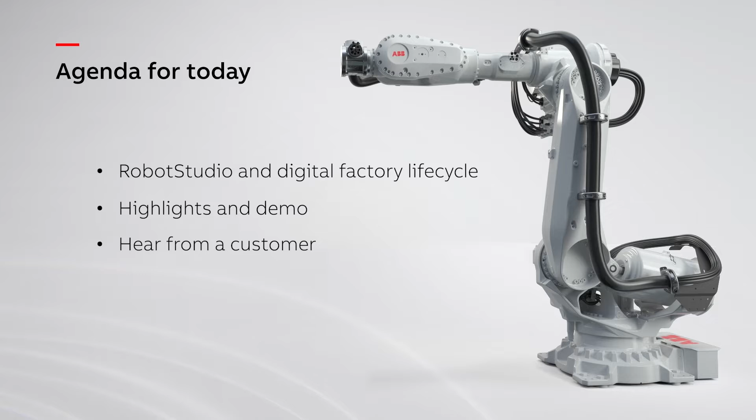Boris and Adrian, thank you for being here today. Boris, you're the head of digital at ABB Robotics. Please, could you tell us what is going to happen today with this big announcement that you've got for RobotStudio? Thanks, Sharon. I'm super excited to be here today. We have a great announcement to make: RobotStudio is expanding into the cloud.

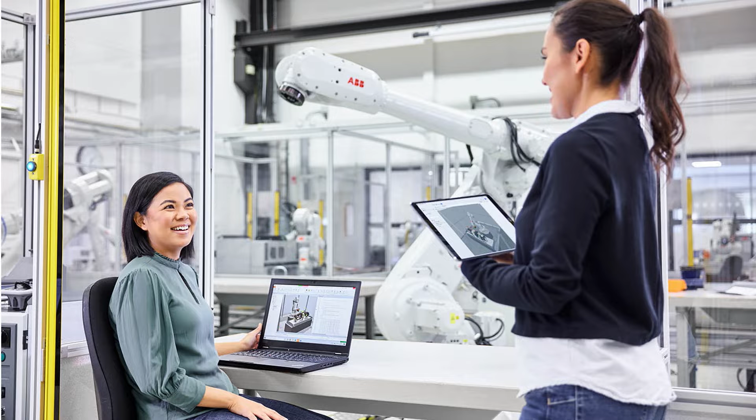And with that, we're introducing a lot of cool new collaboration and other features for our users. For decades now, we've been installing robot systems all around the world, and we took all that experience to develop and continuously improve our RobotStudio system, making it the industry-leading software for robot commissioning and programming. And it shows: tens of thousands of users worldwide are using RobotStudio every day, delivering innovative robotic solutions to their customers.

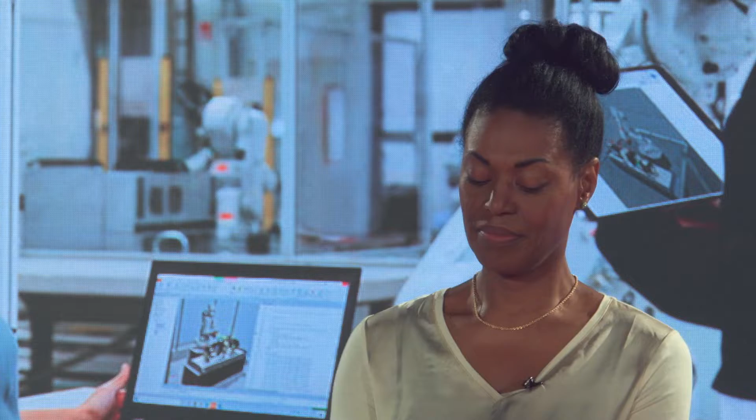And to what extent can RobotStudio support businesses then? RobotStudio is actually active in all the phases of the life cycle of a robotic cell. There are three phases. The first phase is design and planning. The second is building, operating, and commissioning the robot cell. The last one is optimizing and maintaining.

In the past, we very much focused on the first two, with powerful virtual commissioning features which really changed the way things are done in the industry. And with RobotStudio Cloud, we are now truly closing the loop, enabling everybody in the life cycle to contribute and incrementally improve the robot system all the time.

Talking about closing the loop, Boris, let me just add a tiny bit on that. As you may know, at ABB we have a very broad portfolio of automation solutions. We have industrial robots, which we're best known for. We have collaborative robots, we have autonomous mobile robots. And I'm not even talking about the whole partner ecosystem that provides PLCs, sensors, grippers, and things to add on top of the pure robotic cell and solution.

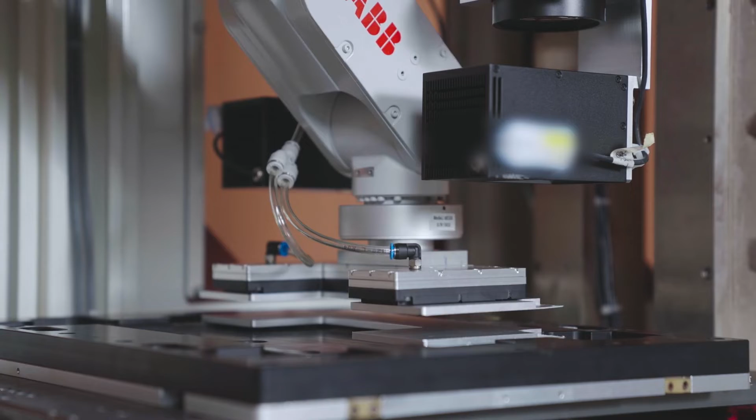So on top of that portfolio, we have over 70 software variants to make sure we have solutions for all the use cases and requests that customers can pass on to us. Now, in my experience from visiting factories and customer sites, we see that the tough part in projects is getting all of that to work together in unison.

Yeah, but not only do we need to get all this working together, all these devices and software solutions produce data - a lot of data - and that can be tricky to manage. We've been collecting that data for more than 10 years through our different solutions. We think it's important to collect it, because that's how you make data-driven and informed decisions to run a factory optimally in real-life situations.

So we believe that all this data from the devices, and getting them to work together, is something that can be done really well in a simulation environment. And that's why RobotStudio Cloud is the perfect hub to get started on that journey.

So it seems like expanding into the cloud is the next obvious step for the RobotStudio journey. Absolutely, and it's embedded in the new way of working which we've all got used to. Just take this LinkedIn Live event as an example - dear viewers, you might watch this from home, your office, or anywhere else. And that makes life more productive and, of course, more sustainable, as you just don't need to travel everywhere anymore. We at ABB Robotics want to be part of that solution with RobotStudio Cloud, bringing collaboration to a new level.

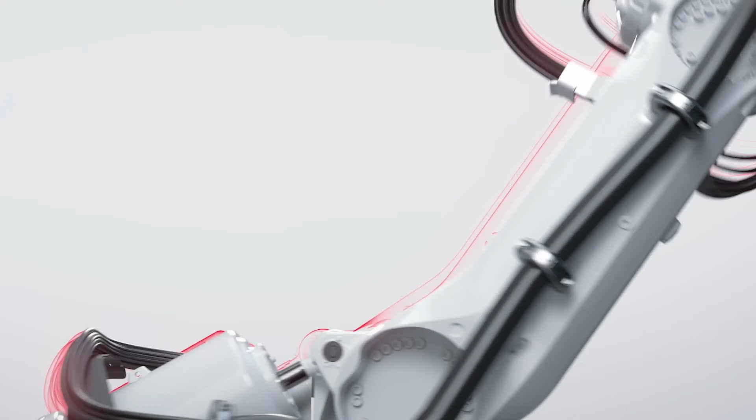Wow, really looks like ABB is helping customers push the boundaries of robotic programming. I'm sure viewers are eager to hear more details about RobotStudio Cloud. Let's hear from Product Manager of RobotStudio Cloud, Magnus, who has been working for more than 20 years in software simulation technology. Magnus, over to you.

I'm absolutely honored being here today, and it's my pleasure to present to all of you watching RobotStudio Cloud. For more than 25 years, we have been the industry leaders and pioneers in offline programming simulation. We at ABB were the company that created the virtual robot controller, a true digital replica of the real robot software that runs on the shop floor, and we brought that to the PC to ensure that what you see on the screen is identical to what happens on the shop floor. We are still the industry leaders in this, and still unique in this area.

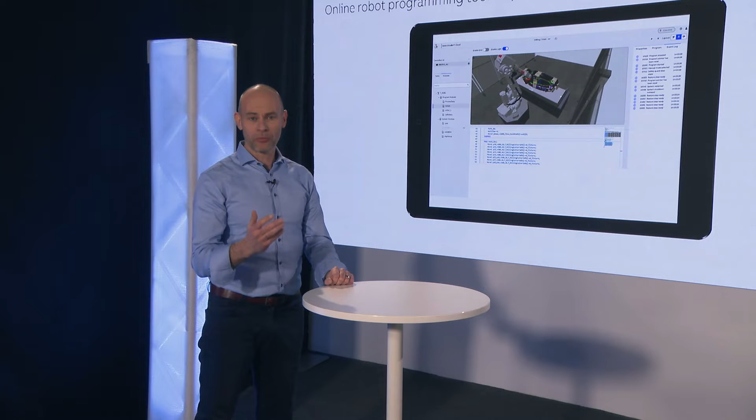Now we take the next level in digital robotics by taking RobotStudio into the cloud, allowing users to create, simulate, and collaborate in real time on automation solutions. So, ladies and gentlemen, I give you RobotStudio Cloud.

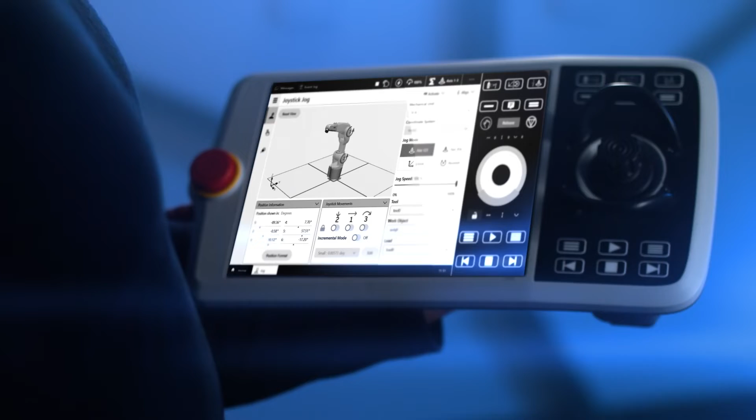So Magnus, collaboration, simplicity, transparency, and best-in-class technology all rolled into one powerful online tool. Magnus, please, we can't contain ourselves. Could you divulge to us how users will benefit from this revolutionary robotic software?

Yeah, the first key highlight is of course the collaboration. Cloud technology enables coworkers, partners, and customers to collaborate in real time on automation projects on any device from anywhere around the world. You can invite your team members and keep everybody in the loop.

That will speed up the commissioning time without the need to be there physically on site. Traditionally, you have to travel to the factory, sit next to the robot, make the changes, and push it down to the robot. But now you can solve that completely remotely by getting invited to the project and solving the issues. As a result, team members become more efficient, stay updated, and are able to work from anywhere with this technology.

So efficiency while working together, anywhere. But what about simplicity, the simplicity aspect?

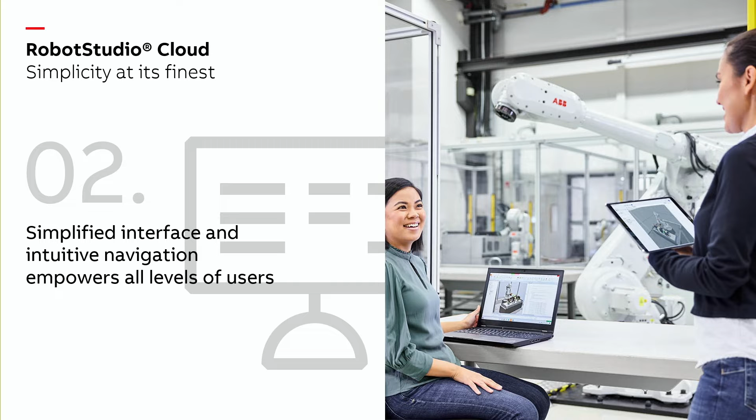The tool is designed for editing and tuning of an existing automation solution, and it comes with an intuitive interface and simple navigation that empowers all users at all different levels. We've taken only the needed but necessary features from the desktop and moved them into the cloud to support fast but still accurate changes to the robot program. The product is designed to lower the threshold for automation, allowing new users and new segments to move into robotics, as well as supporting our more advanced users in their daily work.

Well, you know what, I think we all enjoy a sleek interface with easy navigation. Tell us a little bit more about the transparency side of things.

Transparency is one of the most challenging things in a production system. Keeping track of all the different versions and understanding what is actually executing on the robot controller is very difficult. RobotStudio Cloud comes with a built-in version control system, so you can keep track of all these versions. You can allow multiple users to work in multiple branches without affecting the original file. You can see all these versions in a tree, and you can easily roll back to previous changes if needed. In software development, this is standard, so we've taken those principles and moved them into automation, but simplified.

So I would say this functionality will be groundbreaking for all our users in the next few years. Wonderful. So I think the thing we need to repeat here is that all of this is on top of the incredible industrial leading RobotStudio platform, which has delivered best-in-class virtual controller technology for the past decades.

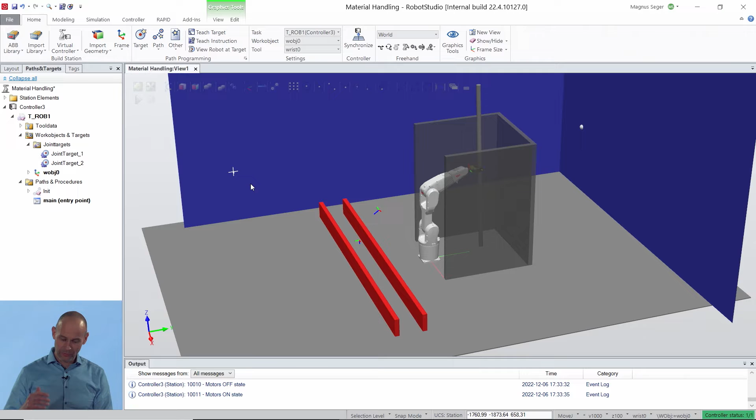Sure, thanks, Adrian. What we're going to do, we have a small sample station where you and I will upload to the cloud, and you and I will collaborate around it. So I will start first from the beginning to create this simple, small program, upload it in the cloud, and invite you to collaborate with me. So let's get going. All right, so over here we have a small material handling station, where we have a robot, a particular fixture, and it's trying to move it in between three separate walls.

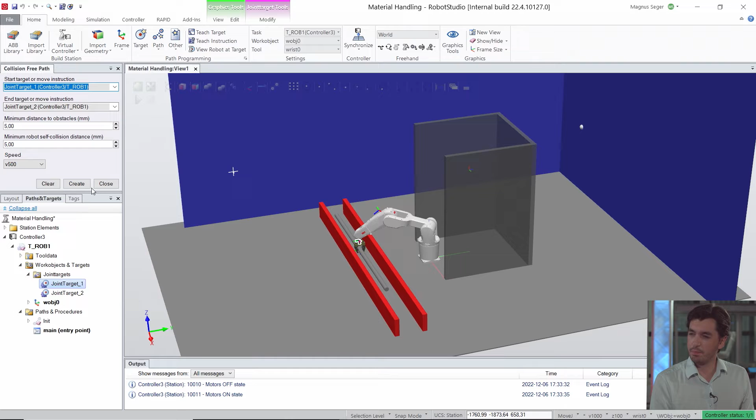So the first thing we're going to need is a path to go from point A to point B. We actually had fun with this particular station with our own engineers who needed a few hours to program this path optimally. But RobotStudio can do a bit better than that. Exactly. So you just select start and end position, and the system creates the collision-free path automatically for you, as you can see now on the screen. So it moves collision-free, and we are pretty much done in seconds to create this path.

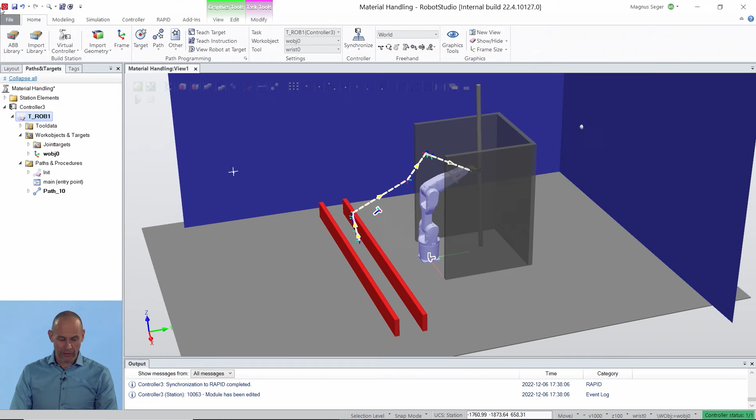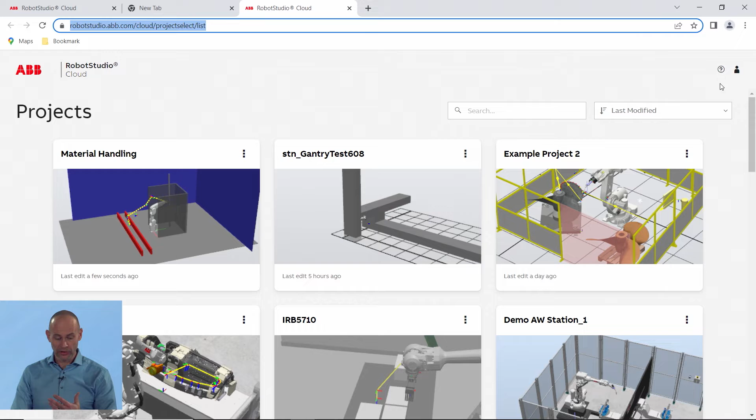So the next thing I will do is actually just upload it into the cloud. So I will share it, I will store it, and upload it. I just do this, and now it's on its way to the cloud. Okay, so I can move into the cloud project portal. And as you can see, the created station, the one that I just created, is now uploaded here. And this is my project. I'm the only one that can see it. And the only thing that I have to do to get you started to collaborate with me is go into the version, or into the dashboard of this one, and invite you to our team. So I simply press invite team, type in your email, create an invite, and email that to you. And now you and me are team members.

Okay, and now over to you, Adrian. All right, so I got your email. Perfect, it's right here in my inbox with the invite link. So let me just click on it and see if this all works as planned. Hopefully I can log in with my personal user account. This is just mine. And yes, I received the cell that you just uploaded a minute ago. So right here, we can actually see the project with all the different things that were created by Magnus. And I have access to all of the branches.

Exactly. And the first thing now, because I'm the owner of this project, you need to create a specific branch to do your changes. So you have to create a new branch just to be able to start doing edits to this product. So first start by creating a new branch. Right here, I click on new, and you just name it to something clever.

And this is like standard in software industries, that you don't work on the main branch, you do the things there first, and when you're happy, you take those changes and put them back to the main branch. So now that I've created this branch, I can basically do the changes I want on the project without messing around with whatever you might have had before, without affecting it. So please open up the graphical view where you can do the tuning and edits.

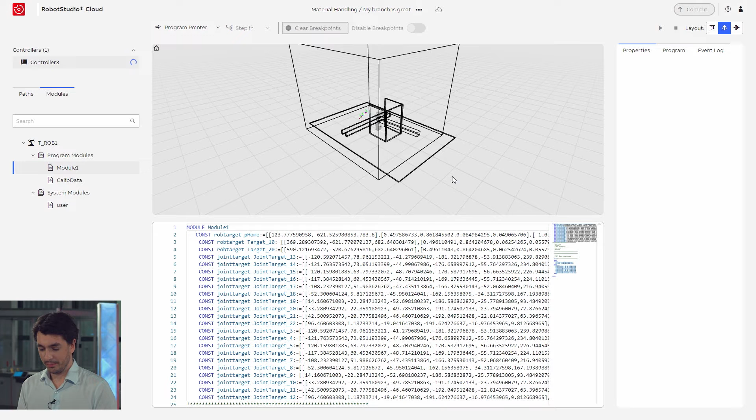All right, and there we have it. I do recognize the cell that you were mentioning from just before. It's the same one with the same path that we had on desktop a minute ago. And as everybody can see, we have this smaller interface that's a little bit simplified. Maybe you can walk us through the different sections that we have on screen here.

So the first thing and the most powerful thing is that you can see now the virtual controller is starting up. So we have the virtual controller in the cloud. And that, of course, will make it possible to test, run and debug the product. So you can actually put in breakpoints and scan through it, just as you can do in a desktop product. Together with that, of course, you have the graphical view where you do the edits and the RAPID programming window where you do the changes to the code.

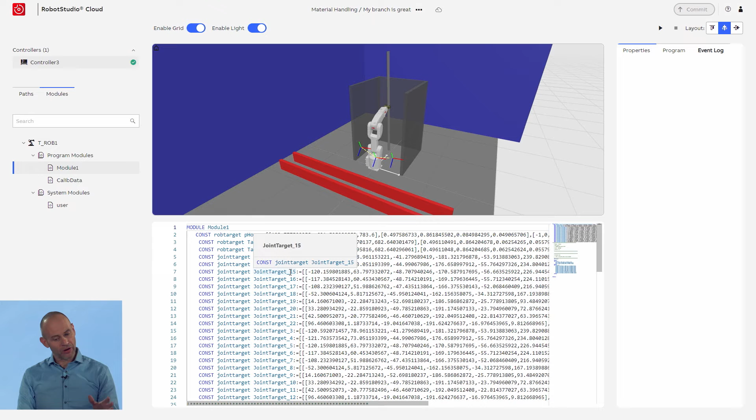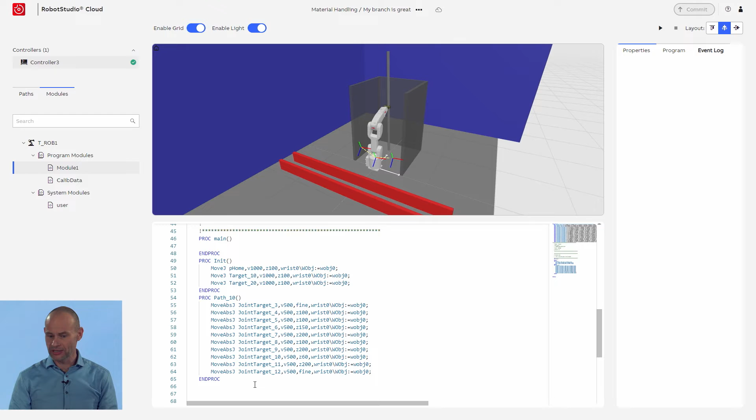But as we said, we have a quite simplified and intuitive interface, so you can actually just select the instruction and do an edit. So if you just demo that, Adrian, select one of the instructions there and change some of the arguments. Sure. You have 2 or 3 different options really here. One is, of course, that you type it as normal, or you select that one and go to the Properties tab to the right and choose the given arguments that you can do. All right, so you don't have to be really an expert to do any of those changes.

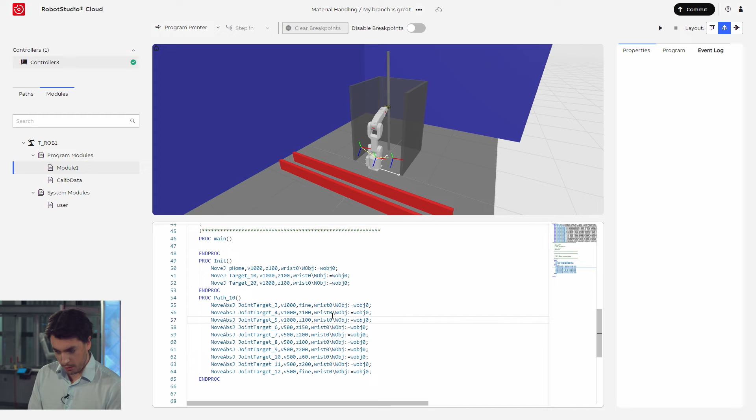Maybe I'll just try and change the speed a little bit in the robot program over here. Let's assume I want to run my production a little faster because we're a little bit behind schedule. So instead of going at 500 speed, maybe we try going at 1,000. See how that works out on a few things here. Let's not get too crazy, let's not mess up our production all at once. But maybe we can try and do that.

So I suppose I just save it with the commit button? Exactly. So now you commit it, and that means that you create a new version in the version control tree. And I have to basically say what I did, so exactly, it's tracked. That is the traceability part of it, that we understand what type of things you added to that program.

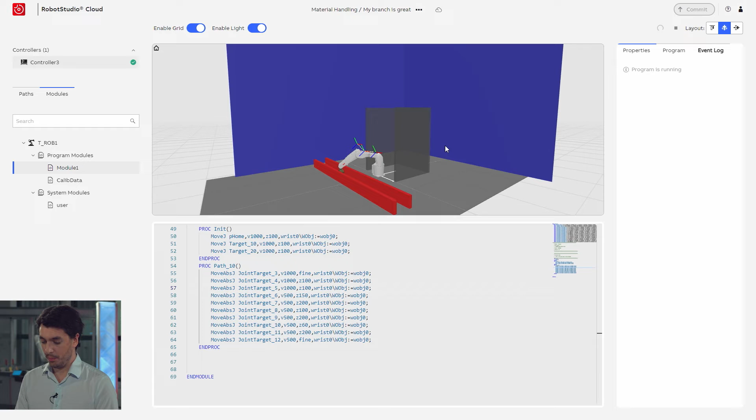All right, so I committed my changes, so they should all be in here, but perhaps before going any further, we just check that they actually work in the cloud simulation. I think that's a smart idea, so I'll just press play. And normally we should see more or less the same program as we had on desktop before, but with slightly higher speed with all the changes that were made. Cool, and there it is. Exactly the same thing, but with some slight changes as we saw a second ago.

But the interesting part is how we make sure that the two versions we have are actually going to work together. Exactly. So the next thing you have to do is go back to the version control tree, and from your branch, make sure it's updated, and then take your changes and merge them - push them into the main branch to make it accessible for the others in the team, for me, for example. All right, so I just refreshed the page.

Yep, and we can see that the commit where I changed the speed, and it's now really, really fast, is back up here, so we can actually see the changes. Yep, and if I click on merge, exactly, it's going to push everything together. And so what do we see on this actual screen?

So this is what you have done and the target - that's his main branch. You see the difference between them and the changes that you added, for clear transparency, traceability of the edits that have happened to that product.

All right, so I can see on the left the version that was yours before. Exactly. And on the right, what I did. Exactly, over here with the slightly upgraded speed. So if I click on merge again, it's going to put everything together, and then it's going to create a new version in the main branch, with your changes included. Let's give it a try.

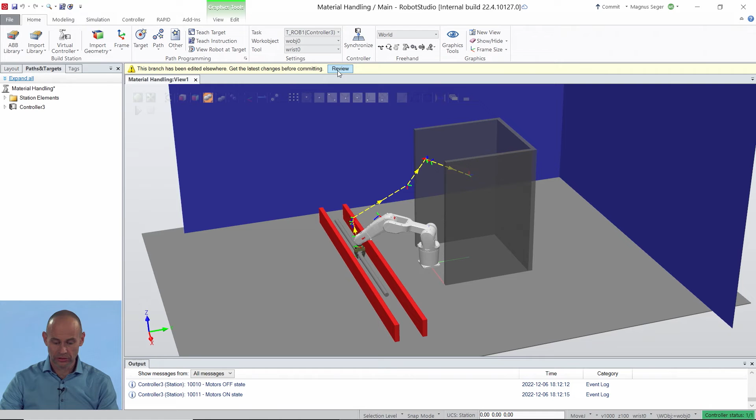So you made a commit to the main branch. We are a bit out of sync right now, but as you can see in the desktop product, you get a message that things have changed from the outside. So you just take those changes and push them down to your computer. Yeah, that's what you see in the yellow banner at the top right there. Exactly, so you can see changes have happened. I just review them to make sure those are the right changes, grab them, pull them up to my PC, and we are now in sync.

And that's pretty much what it's all about. You and me collaborate - we're working against the same data with different tools, and you use the tool you're most comfortable with, and you edit and update it along my automation product.

That's great. So just as a quick summary, what we saw is we both got invited to work into the same project on two laptops that were not connected to each other, nothing special. I did changes, you did changes, and at the end we put them all back together, and the user can choose which version is the best for him and track which one is being pushed onto different devices. So that is the power of RobotStudio Cloud and what's being brought into market today.

Adrian, that's so intuitive and, like you said earlier, a very familiar way for working for many of us. It seems very simple, but is there a huge benefit to this, isn't there?

Yes, there is. And really the highlight for me is that the problem we're trying to solve is this person running around the factory with a USB stick in their hand, updating devices and making changes all day long, every day, and then eventually something happens, something breaks down, and there's no trace of anything that happened. There's no way of finding the root cause of that particular issue. So that's why we really wanted to bring the version control feature out as quickly as we can, to get started on the path to solve that problem.

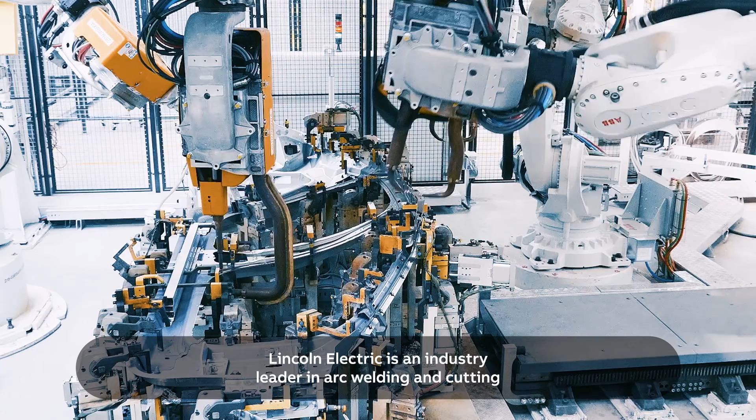Lincoln Electric is an industry leader in arc welding and cutting, and we are proud to be known as the welding experts. We're the supplier of choice for a wide range of industries and markets, including automotive and transportation, shipbuilding, building construction, power generation, pipelines, and offshore platforms, to name a few.

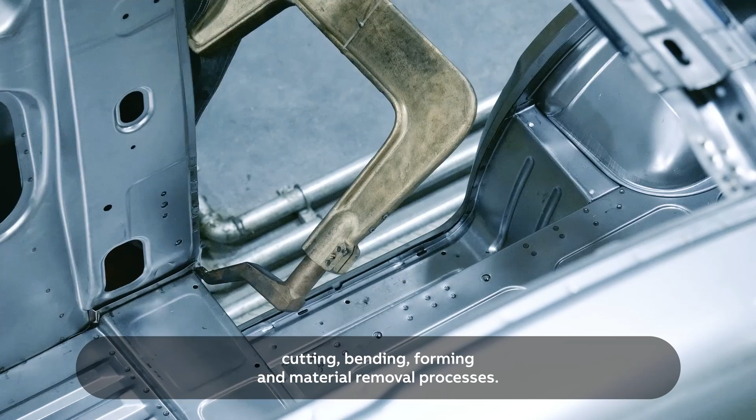A big part of what we do for our customers relies on developing advanced and new fabrication techniques, often making innovative use of arc welding, cutting, bending, forming, and material removal processes. Robotics enhances our ability to innovate, and RobotStudio is instrumental in helping us bring new products and solutions to market and optimize workflow efficiency.

At Lincoln Electric, we use RobotStudio on a daily basis from engineering to commissioning. On a project with average complexity, RobotStudio allows us to cut our development and commissioning time in half. On a larger, complex, offline programming project, we reduced real robot downtime by 90% in some cases compared to a pendant-only approach. You can be up and running with RobotStudio extremely quickly.

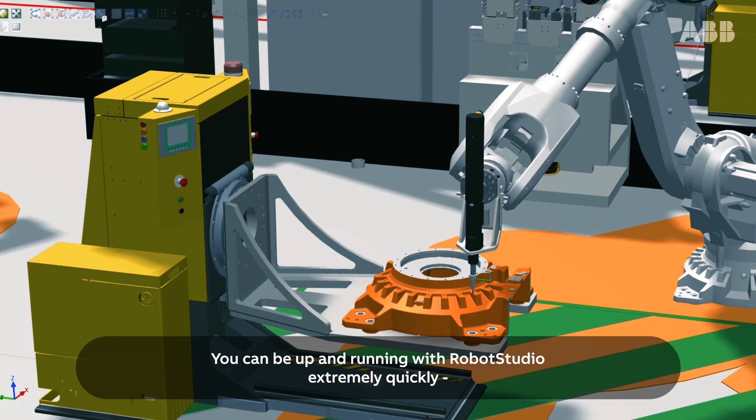Because we were working on the application of RobotStudio ahead of time, we had our software running on our new GoFa cobot within 45 minutes of receiving and powering it on.

RobotStudio also plays a significant role in helping enhance employee safety. A lot of our work is in the heavy welding space for clients in industries like mining, construction, and agriculture. By simulating in RobotStudio, we don't need to send our people 30 feet up a ladder or dispatch them to potentially hazardous locations to perform manual testing.

We know with confidence that what we see in the simulation is exactly what will happen when we deploy on the factory floor. Today, we're really excited by the announcement of RobotStudio Cloud and the additional benefits it will bring to our business.

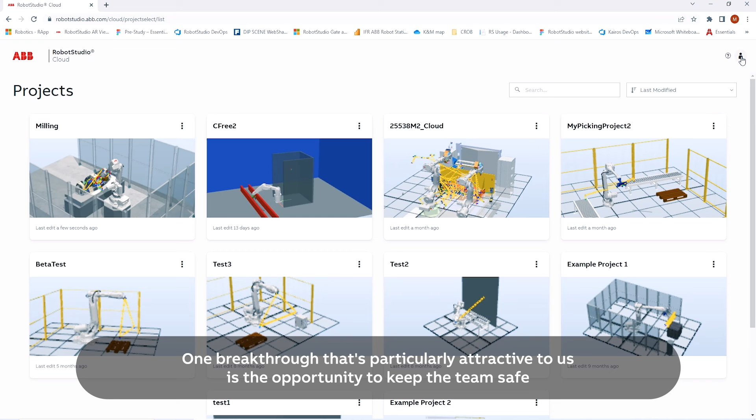One breakthrough that's particularly attractive to us is the opportunity to keep the team safe during all parts of the planning, designing, and programming process. Collaborating in the cloud lets different team members work on the same project, keeping track of all changes in real time.

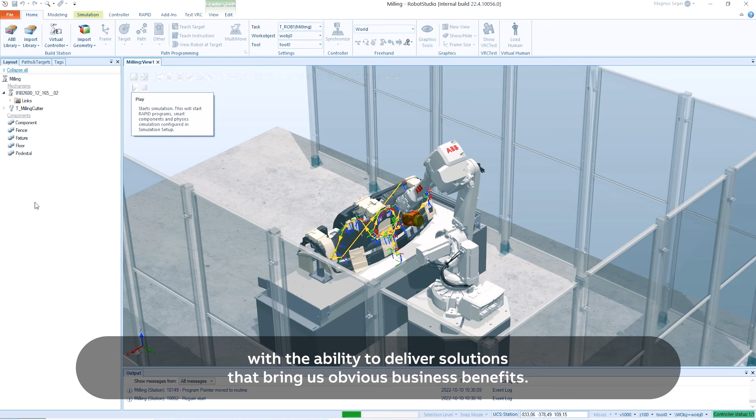Thanks again to Magnus and everyone on the ABB Robotics team who have put so much effort into the development of RobotStudio Cloud. It's great working with a partner who has such a deep understanding of what we and our clients really need, with the ability to deliver solutions that bring obvious business benefits. Congratulations on today's launch, and we look forward to using RobotStudio in the latest remarkable development of their industry-leading technology for many more years to come.

Thank you, Matt. That's high praise for RobotStudio Cloud. Incredibly, they've reduced their commissioning time by half and reduced their downtime by 90%. It makes me really proud to hear how RobotStudio Cloud can help our customers in their daily business.